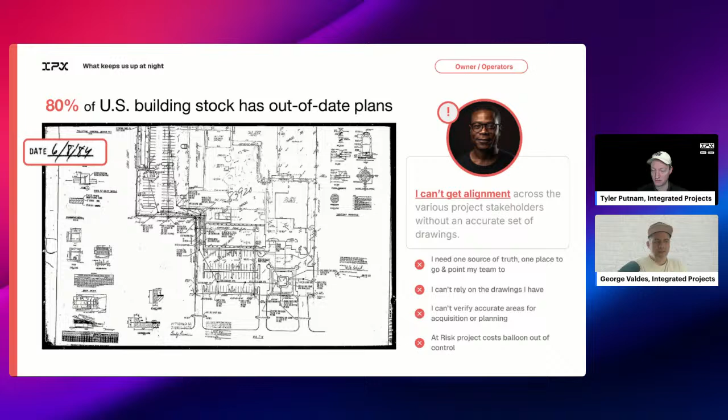So just to reset on why we're here, why does Integrated Projects exist in general? Essentially, it's because there's not a lot of validated information out there related to buildings. Anyone that works in and around buildings would be familiar with something like this, whether it's a rolled up blueprint, a series of blueprints, or an outdated PDF that lives somewhere on Google Drive. The reality is that a lot of people are working with unverified information in out-of-date plans, and it has issues, right? The consequences of not having accurate data can compound throughout the course of a new renovation or some other design and construction project.

So we believe that there's a huge opportunity to be the future of how companies verify spaces. And we believe so much in it that we do it end to end. So we have two different services: SCANIT, which means that you can mobilize us on site, almost like requesting an Uber. You basically give us an address through our platform, and with a couple of details, we can get started on the process to go on site within a matter of days, and then scan a space and use the next service that we have called BIMIT to digitize it.

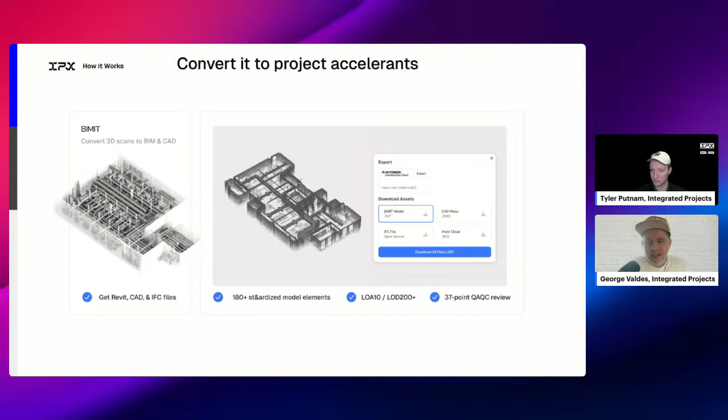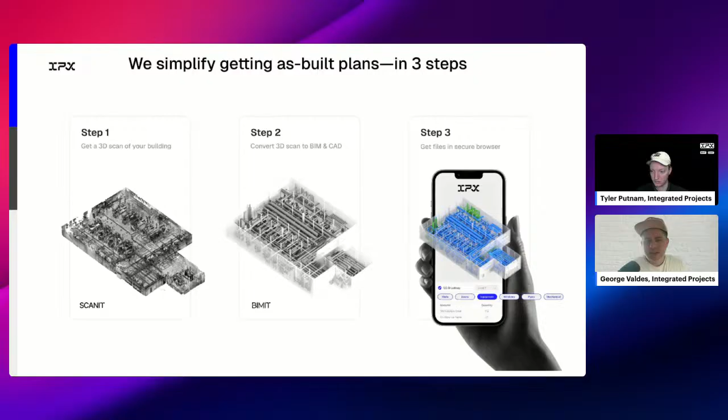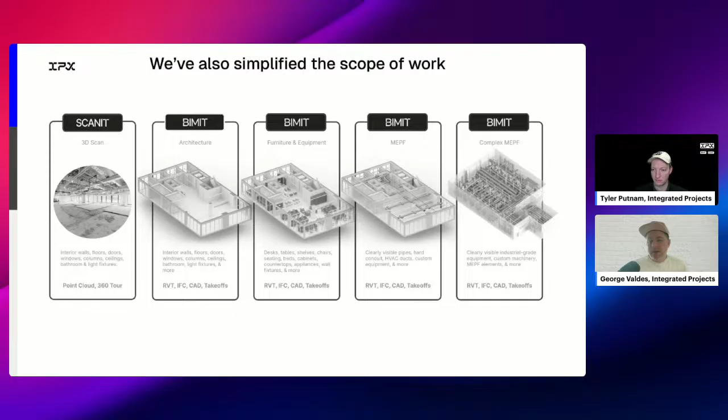So we take a point cloud, we bring it into Revit, and we start to go through the whole process of QA/QCing. Along the way, we leverage our platform to deliver everything. So it's a very simple process. Depending on where you enter from, it could be two to three steps. And we've also simplified this by simplifying the scope of work. Unlike some other more traditional ways of doing this, you might have a lot of ambiguity in terms of what's the scope that you want to actually convert into a digitized model. We make it very, very easy for folks, which means that, as we've talked about in the past, we've had to really focus a lot on operations and how do we systematically improve that.

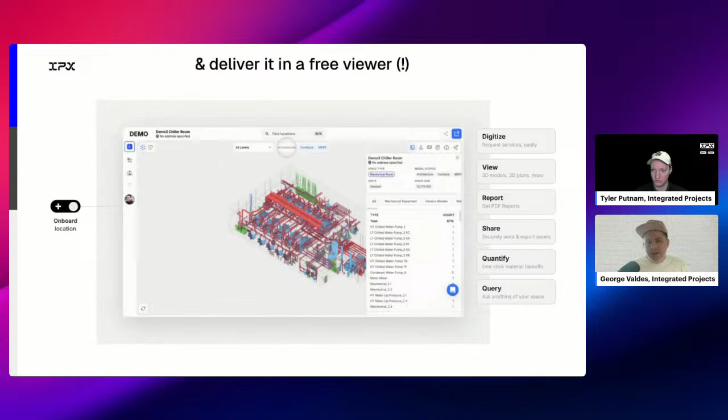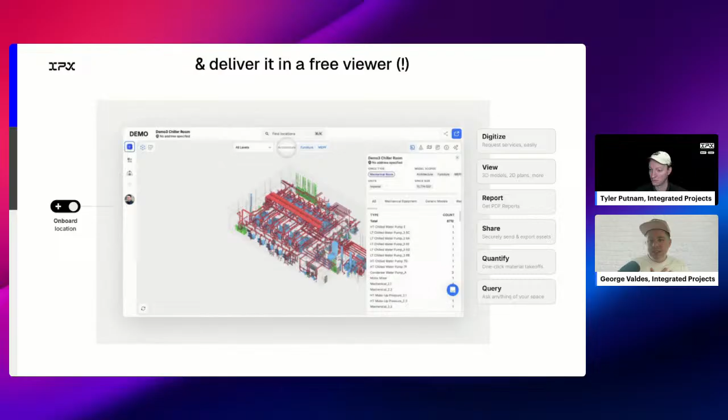And as I mentioned before, we deliver it all into a very easy to use viewer that allows you to do a lot of different things like cut sections, take screenshots, add comments, get even quantified counts of all the elements that are inside the deliverable that we provide. We also host virtual tours for free for our customers, whether it's things that we've created or ones that you want to host, to help people collaborate more effectively around that pre-construction stage. We've also done this a lot, over about 5,000 times, in a very short amount of time.

And so we've learned a lot about what it takes to deliver this at scale and at quality, to the point where we've been able to do it also across a whole series of project types, from very small spaces to large complexes, whether industrial or airports or pretty big, massive square footage.

And along the way, as you probably have heard, we've started to use this really fascinating, what we believe to be the largest structured data set of buildings in the world, to unlock new, basically moving towards a foundational model for scan to BIM conversion. And we have made incredible progress. We're about to, in a month or so, announce some pretty exciting updates to this.

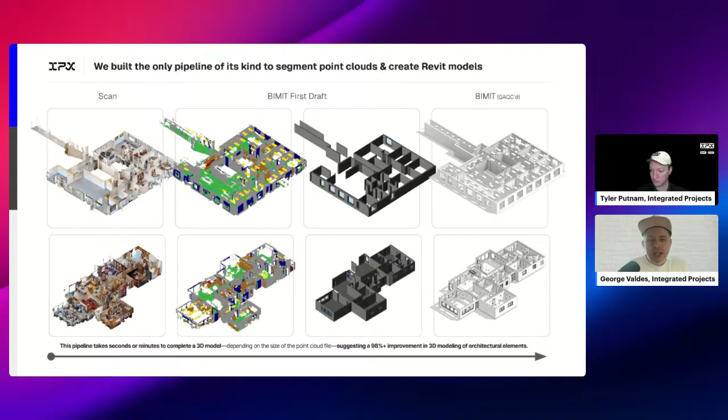But essentially, we are able to segment point clouds, convert them into Revit models, and use that in our own processes, saving our own modeling teams a significant amount of time. So today we're going to talk about control points. We'll get into more detail about what they are, but I think it's helpful to work backwards from what happens when you don't use something like control points.

And this problem of alignment compounds when you're talking about large spaces, where if you can imagine that these are very sophisticated cameras with a lot of sensors, but over a long enough space, they can start to lose track of where things are. And so all the control points do is help to make sure that there's a checkpoint in some sense, a good reference point. So large spaces can come into conflict here.

Things like stairways, if you're scanning multiple different floors, there can be a lot of issues there if we're not using these types of markers in space. And then also even things like hallways. If you've ever been to Las Vegas and stayed at a hotel there, I think it's the Venetian that has those long, spooky, infinite hallways that are very undifferentiated. That's not good, right? Because if these sensors with cameras see the same thing many times, it kind of loses the plot. It's like, wait a minute, where am I now?

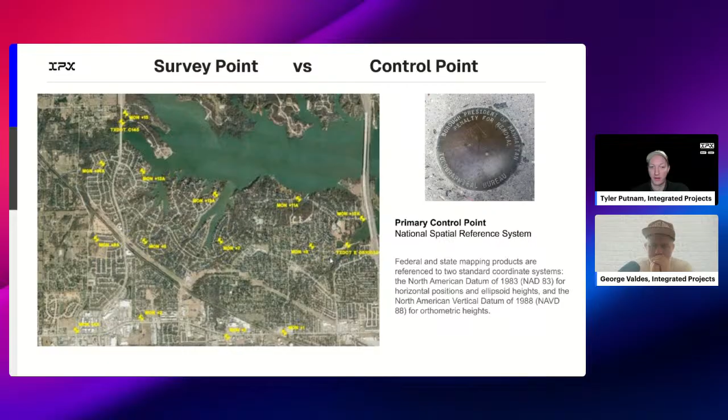Effectively, more or less, there's two different coordinate systems that it has to be compliant with, right? That's the North American Datum of 1983, typically known as NAD 83, and then vertically the 1988 NAVD for the vertical orthometric height. These are already established by local or federal governments, right? And these positions are the ground truth of geospatial positioning.

So downstream from that, on more of the local level, you get your second, your third order, your fourth order control points. These are where a licensed surveyor will basically geo-reference using trigonometry and lots of technology, all kinds of things, to very specifically get the northeast coordinates, the grid coordinates, the spot elevations, even crazy convergence angles, right? As you can imagine, the world is a sphere, so doing math on a sphere even made us break Euclidean mathematics, right? And invent an entire new way to do this type of computation.

Downstream from that, generally speaking, the second orders will be, let's say, on street intersections or major structural grid lines, and then the basic perimeter. Then you can start to triangulate your way into your third order control points, et cetera. All of these are tying back to those primary control points to be able to give us a geolocated reference to where we are in the world in, let's say, 5 to 15 millimeter accuracy. When you start to get into this stuff, it's a little bit crazy. And we're not going to go into a deep rabbit hole here, I promise. Although I can at any point if anybody wants me to.

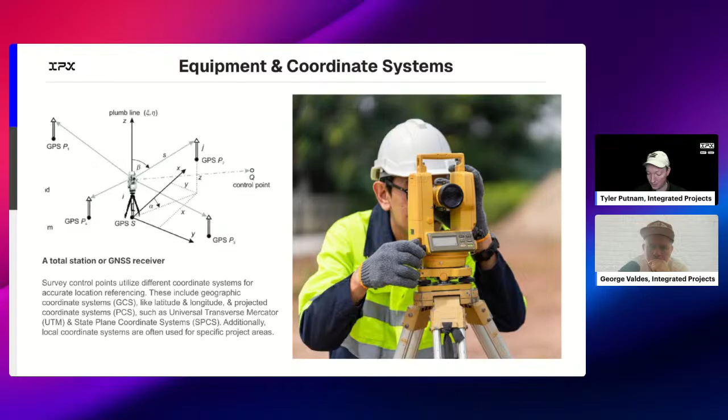And ultimately, as an architect, engineer, general contractor, this is usually where we get our first kind of exposure to this kind of documentation. A little hard to see here, but what you'll see on civil survey drawings are X's and triangles right on the civil plan with a number on it. That number corresponds to an Excel spreadsheet, some kind of tabular data that contains the northern and eastern coordinates as well

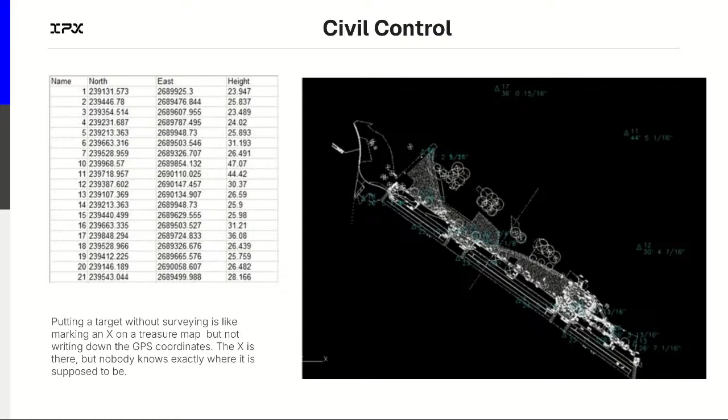as that height, right? If you have survey points or control points or target points or any point for that matter that doesn't have north, east, and height in it, it's actually not a control point. They can still be useful, but it's not technically or legally speaking a control point.

And you can simply input the data there, and it will geolocate exactly, mathematically speaking, your project onto the Earth. Without that, it's just kind of guesswork, right? The project base point, on the other hand, is a local coordinate system, which is tied only to that project. That can also be tied to a control point. Doesn't have to. There can be multiple project base points in a project.

I was consulting on some of these crazy international projects where we're doing 30 buildings in a community, high rises, all of this stuff. I think we had something like 100 different project base points in that, right? And then finally there's this sort of invisible, unspoken, really difficult to pin down coordinate system that's relative only to Revit, which is called the internal origin. And that's simply used for coordination between other software like AutoCAD or Rhino or these various different things, right?

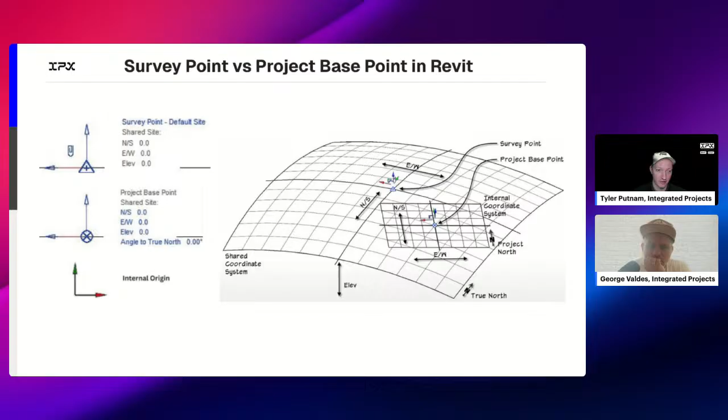I mean, it is so foundational, and yet kind of a mystery for most of us, right? Sorry, not to wax poetic on that. No, I mean, I was about to jump into the territory we talked about before this, about how even things like earthquakes actually change the world and therefore change delineation of property because of this stuff.

But that's more for another time. Absolutely. Maybe in Vegas someday. Yeah, maybe for that long corridor in Vegas.

Okay, so let's get back on track and get in control. So, what are control points? These are the typical ones that you're going to see out there. At the very basic level, you have a quadrant marker, which literally is a black and white checker box that is used for general visual interest. And this can be tied into controls or not, meaning it can be tied back to the geolocation or not. And in the case that it's not, it's really just a marker or a target.

Now, this is still very useful, as we'll get into in just a minute, but just know that when you're using this kind of target, it's not geolocated. The same is pretty much true with...

Oh, awesome. Scott. It's great to see Scott here, actually. A lot of our conversation that Scott and I recently had kind of inspired a lot of this speech here. But yeah, I'll definitely do a deep dive on Revit coordinates.

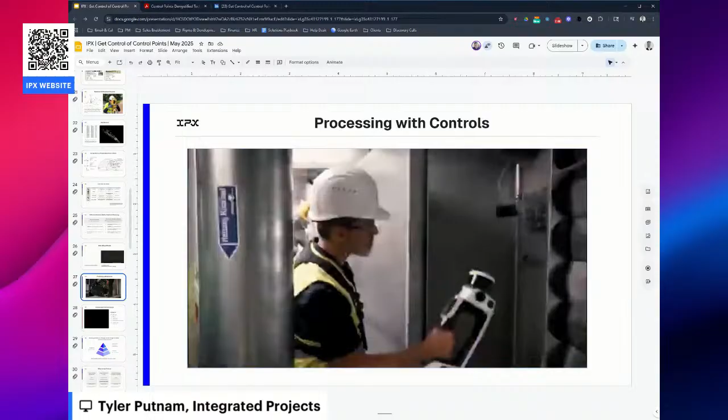So effectively, it's not a stationary position where it's shooting out the points. It actually takes into consideration the speed and the trajectory that you're moving to be able to recognize all of these features for reality capture. So that all sounds probably a little intense, right? But just to demystify it, what does this look like? In this case, this is a very new, super cool device from one of our favorite vendors, NavVis. This is the MLX. And what he's doing here is scanning with that LiDAR, walking around the space, registering it to a control point, which automatically puts those geolocated coordinates into all the rest of this crazy math that's going on.

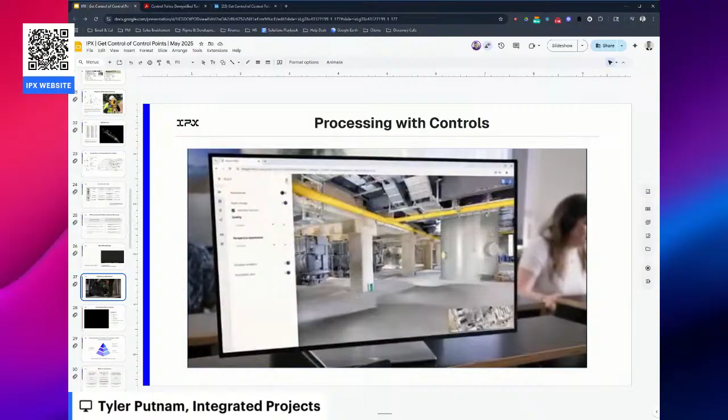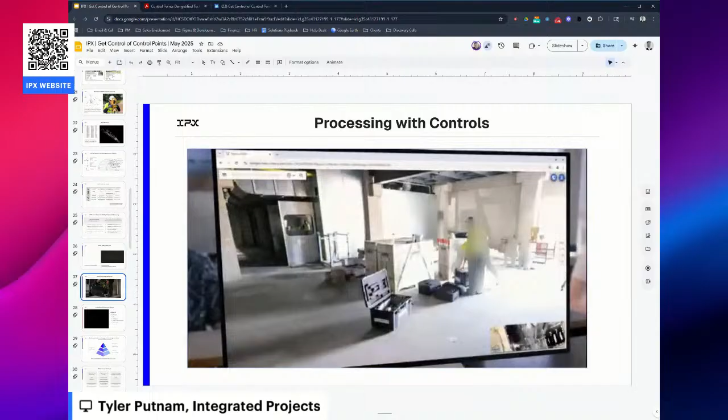And then you can see here he's doing some of the post processing of that information, and effectively stitching together all of these different point clouds, as well as the virtual tours, so that in the matter of a day or two, we have a visual description of that space that we can walk around and see virtually. And to get into it a little bit, I mentioned those two really large issues, right? The point cloud misalignment and the drift.

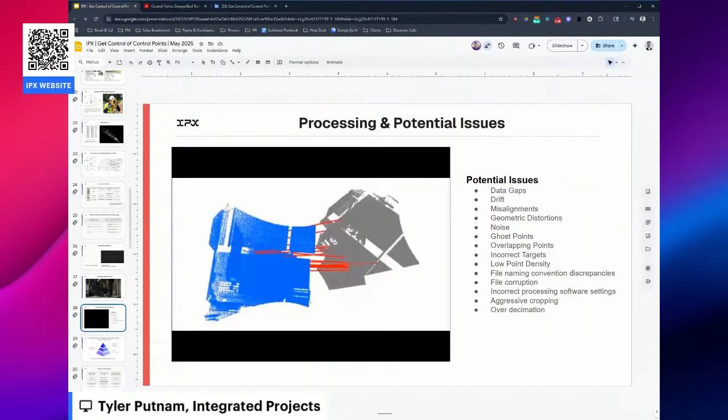The point cloud alignment could be a potential issue for either SLAM-based or terrestrial laser scanning. So in the case of terrestrial laser scanning, every single time that you do a setup, you have to somehow get each collection of millions of points together and fuse them so that they are all referenced to themselves locally in their space. Or in the case that you do it with control points, you can greatly help that whole situation by having those geolocated controls. A lot of other potential issues can happen here, and typically the larger or more complicated the project is, the greater the concern.

But the second one that I mentioned before was drift, right? And that's something that's cropping up because of this SLAM-based technology. But by using targets or controls, it greatly increases the accuracy. There's a whole host of other QAQC checklists that we go through. Noise, ghost points, overlapping points, low point density, all different kinds of things. But really, at the end of the day, the one single shot solution that we see to reducing a lot of these issues is setting up a target or a control point.

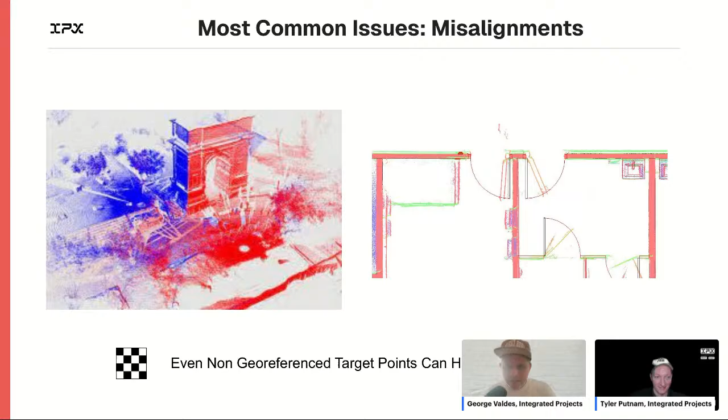While we wait for some questions as they come in, I think maybe we can talk a little bit about... I don't know. I mean, as we were preparing for this presentation, what we talked about was very technical stuff around it, but it is very fascinating. Even just thinking about the history of these things. These things don't just come out of nowhere, right? Why would we go through the trouble of putting all these metal markers in every city, and not just in the US but in the world, right? These are everywhere. Why should they exist, right?

And it was very interesting going back and even learning that it was a big push early on by even Thomas Jefferson looking at how to survey the coastline. Maybe not for metal markers, but the evolution of it being something that was all about understanding the coast to start, and then kind of moving inward from that, and the coast being really important for everything from trade to the military perspective, right? It was the biggest surface area that the United States had.

And yeah, it's incredibly fascinating to know how much the history of these points in general is tied to our relationship with land or our relationship with property. One of the things that Tyler and I were talking about was a conversation we had with someone at Autodesk University that was really tuned in, like 20 years or more in the industry on this topic, and was talking a lot about the present-day challenges of recognizing that the world is moving.